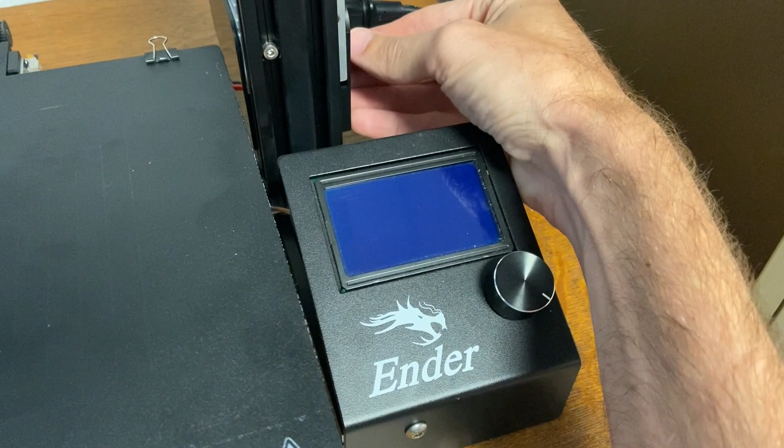So you can see the display comes up, it displays which firmware version you're using, and then you've got some information about the printer. So you've got, this is an Ender 3. This little symbol here indicates the nozzle, and it's currently at 22 degrees Celsius. This is the bed temperature. That flat plate is your print bed here, and it is also currently at 22 degrees Celsius. So that's just ambient temperature of the room I'm in.

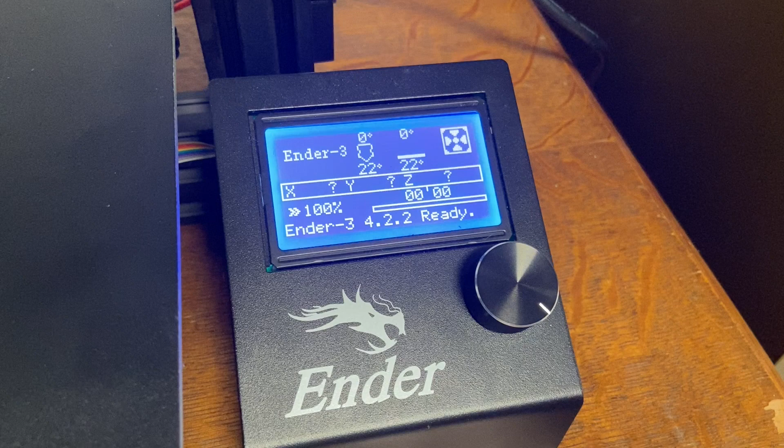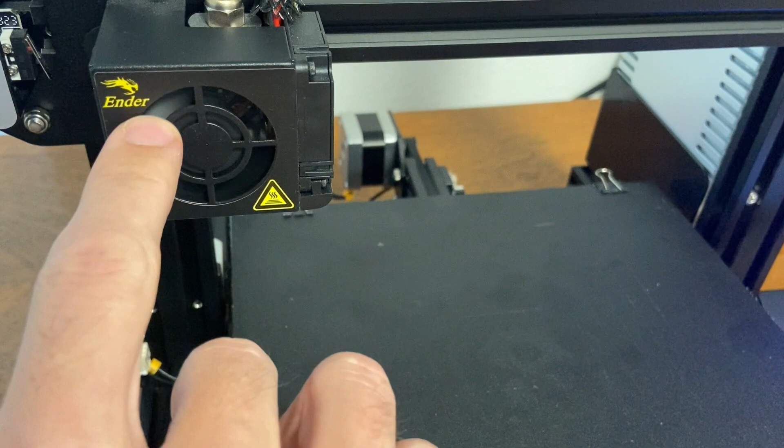Over here, this is a little fan icon, and you can hear the noise running. And that is the fan that is directly in here. And so it's got a pretty good guard on it that you can't get your fingers in, but just don't stick anything in there. This fan will run anytime this printer is powered on. So it's kind of noisy, but this fan is plugged directly into a power port that as soon as the switch turns on, this fan comes on.

There's another fan on the side here, and this fan will be used when you're actually printing. It blows some air down underneath this nozzle and helps cool the plastic that's coming out of the end of the nozzle. And so when this fan is running, you'll actually see this little fan icon spinning.

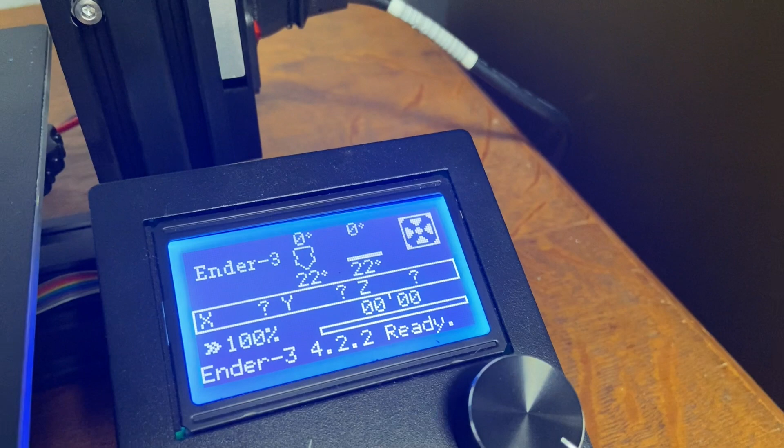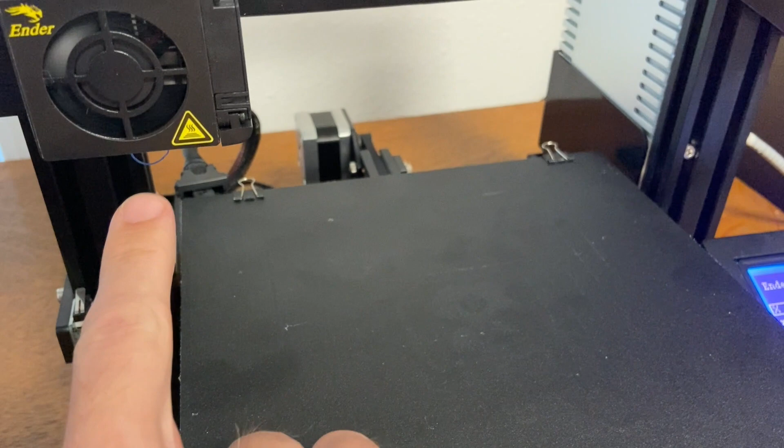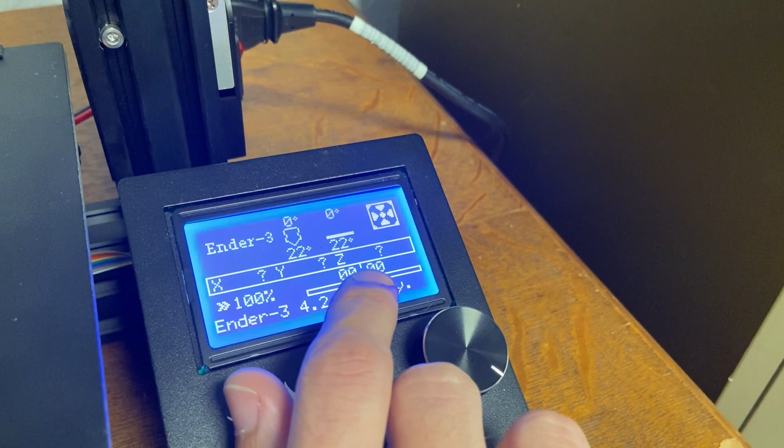So you've got some numbers here. You can see your X, and it currently is changing between a 0 and a question mark because it doesn't really know where the tip of this is yet. You can see the same for the Y and the Z. It doesn't know the position of the nozzle. Here you can see like a little stopwatch type thing. You've got minutes and seconds, and when you're actually printing, this will change and update to show how long you've been printing.

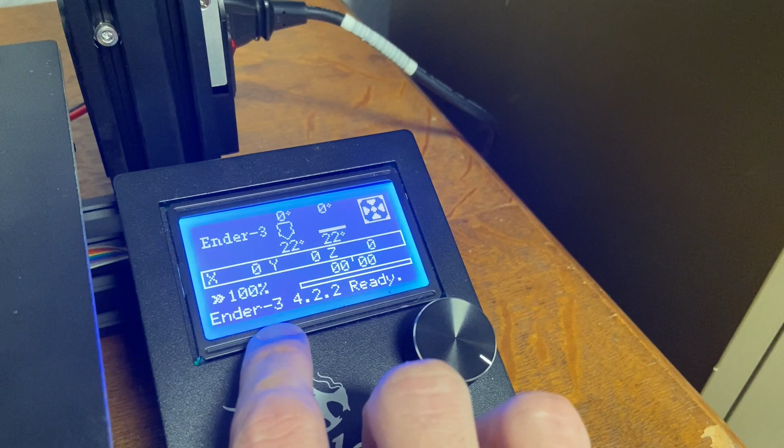Down here we see Ender 3, and we can see that the version of the control board that is in this is a 4.2.2, and you can see it's in the ready state. If you push this button, you go into the menu. In this menu, you've got several different settings or several different controls. You've got motion, temperature, configuration, and you can see about your printer, and then you can see it says no media. We'll come back to that in a bit.

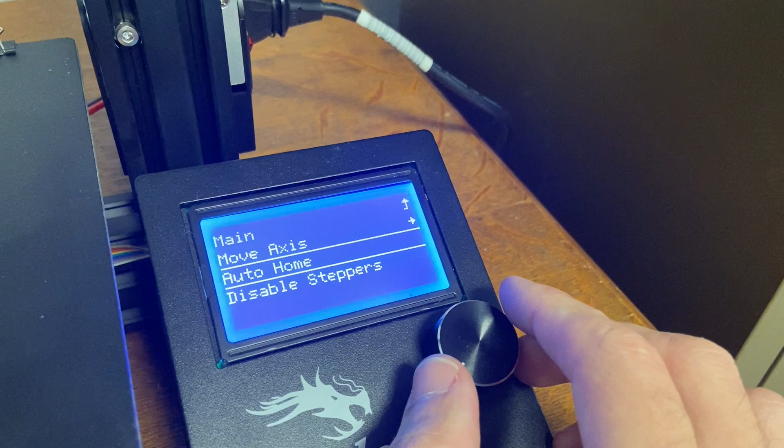So if we click into our motion, we can see we have an option to move the axis. We can auto home, or we can disable the steppers. The steppers are the motors that control the movement of this machine. They're called stepper motors. So if we go to move axis, actually, let's go back. We'll auto home this. So I'll go down, and as soon as I click this button, it'll go into an auto home procedure.

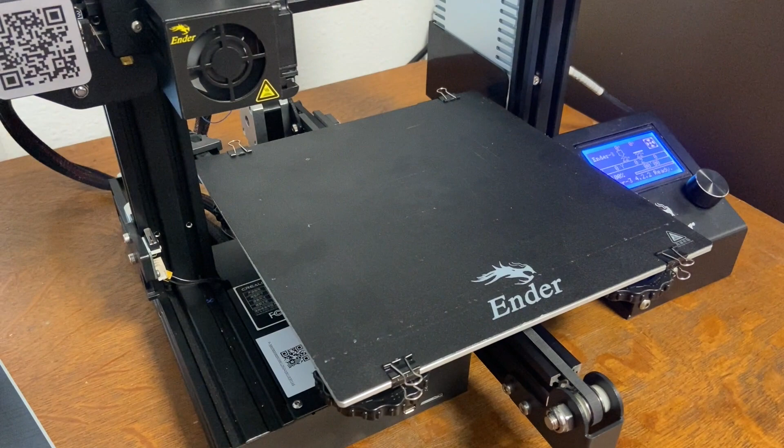And basically what that does is there's a limit switch. So this is a Z limit switch. There's a limit switch up here for your X axis, and then there's one back there for your Y axis. And it'll move until it hits each of those switches, and then it knows that the tip of this nozzle is at the home position, the 0, 0, 0 position. So we'll go back into our menu, and we'll hit auto home.

So it goes up a little bit just to make sure that it has some room to travel. And you can see it did just a little bump on the X axis, and here the build plate will go home. And it's moving at a slow speed right now because you don't want to risk crashing that nozzle into anything. So it goes super slow so that it can stop when it needs to. And you just heard that little switch click.

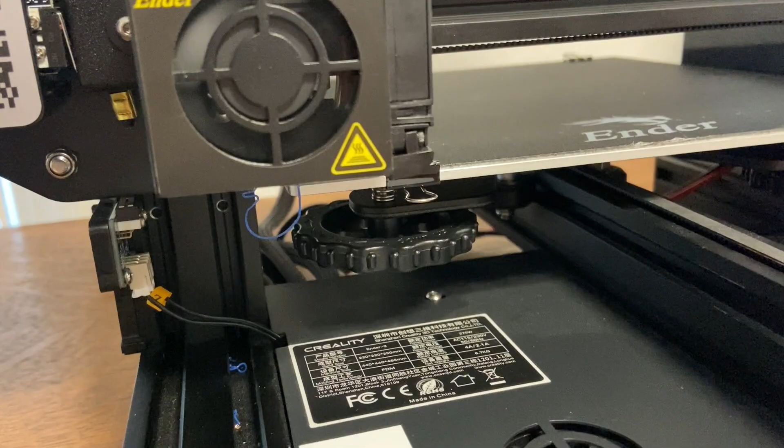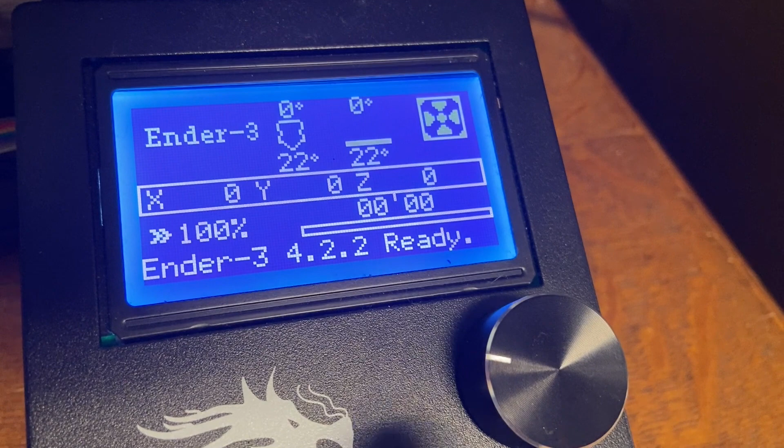And so now we're at the 0, 0, 0 position, and you can see our coordinates have stopped flashing to the question marks because now it knows exactly where it's at. It's at the 0 home position. So now if we go into motion, we can move an axis. And so let's start with our Z just so we get our nozzle away from the bed.

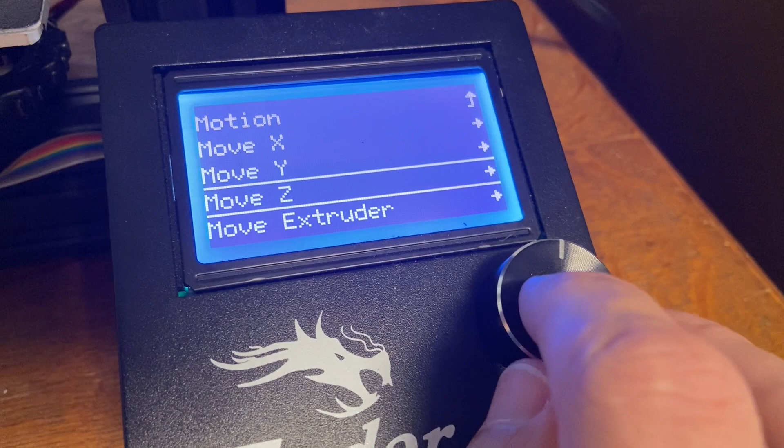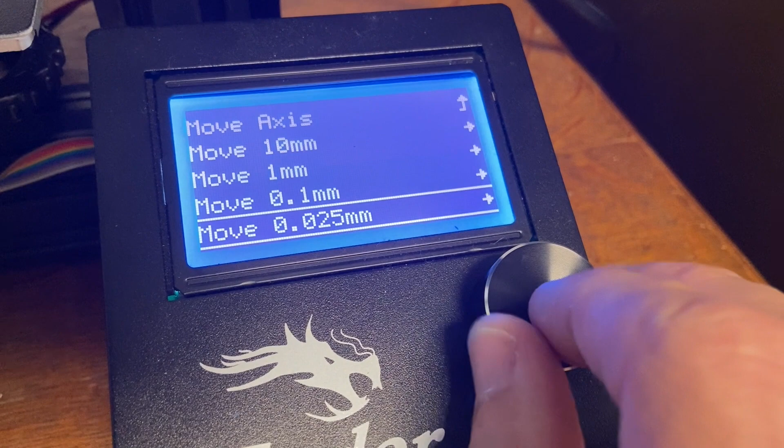So you can move this in increments of 10 millimeters, 1 millimeter, 0.1 millimeter, or you can even go down to 0.025 of a millimeter, which is very tiny. So we'll go to 10 millimeter. So it's going to be a 10 millimeter step. And when I rotate this just one click, it will go plus 10 millimeters. So it should raise this up 10 millimeters.

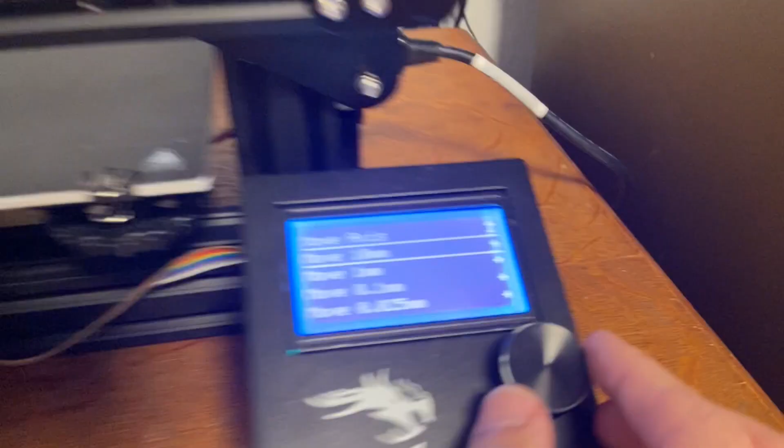And we'll do another 10 millimeters. And now we're at 30 millimeters. And then if we go the other way, it should go back down. And back down to 10. And we're gonna stop there. So we can tap the button to go back, go to the very top, to the up arrow. And now we can do the same thing.

We can move the X-axis, which is this one that goes left to right. So we'll go to a 10 millimeter setting. And now let's do a 0.1 millimeter setting. So see if you can tell how much this moves.

It just moves a very, very tiny bit. And anytime you want to go back to the previous menu, you just go to that return arrow and tap the button.

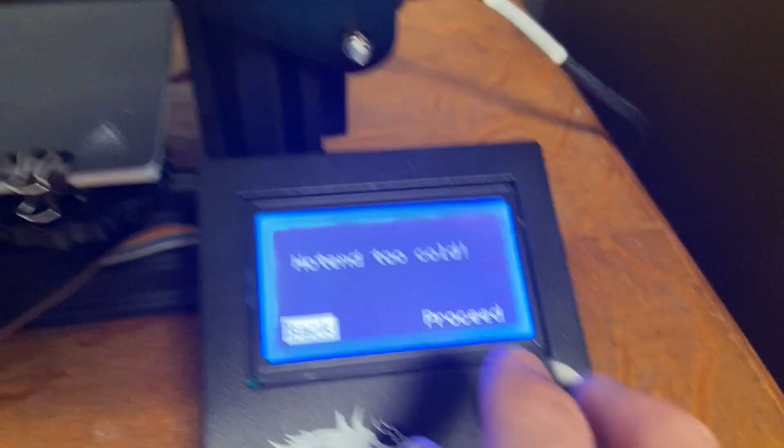You can also move the extruder, and since I don't have any filament in here yet, I will. Oh, so right now I just tried to move the extruder and it tells me hot end is too cold. So that's just a warning. If we had filament in there, you never want to move the extruder unless this hot end is up to the proper temperature for whatever material you have loaded.

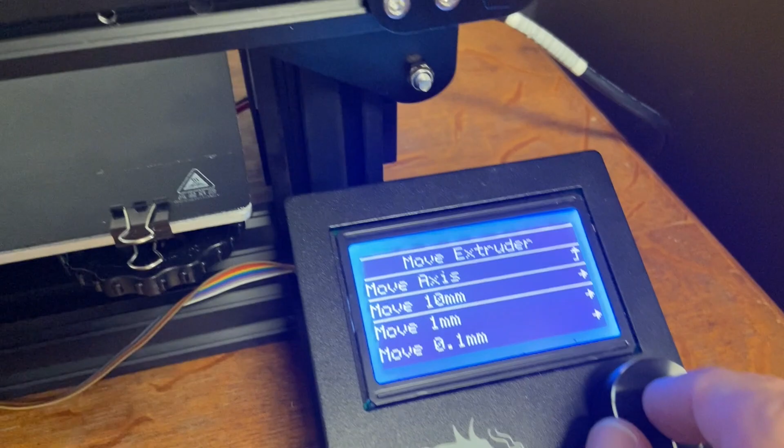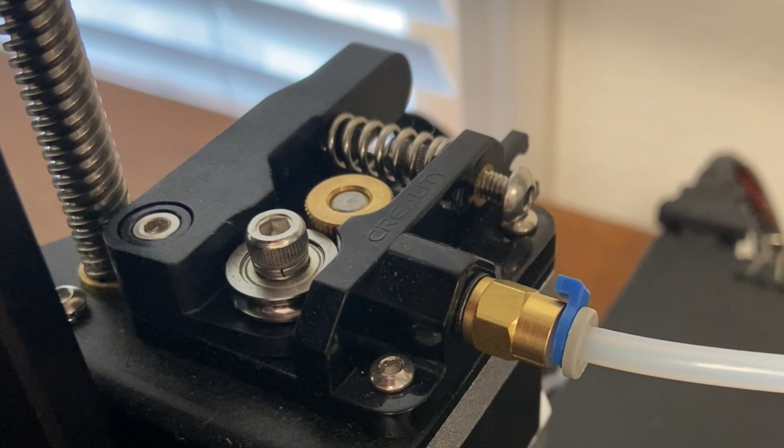But just to show, I'm going to click proceed and I'll do 10 millimeter step. And so when I turn this once, you should see that gold circle there in the middle start to move. Very slow. But if there was filament loaded in there, it would be pushing it through this tube. So I'm going to back out of this. I think that's all we've got in here.

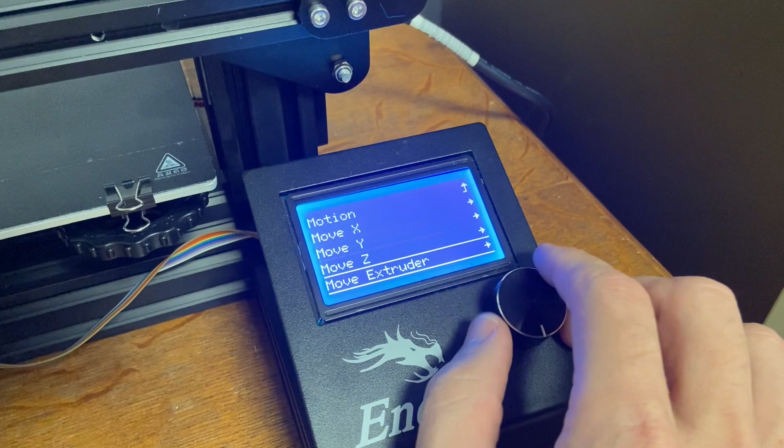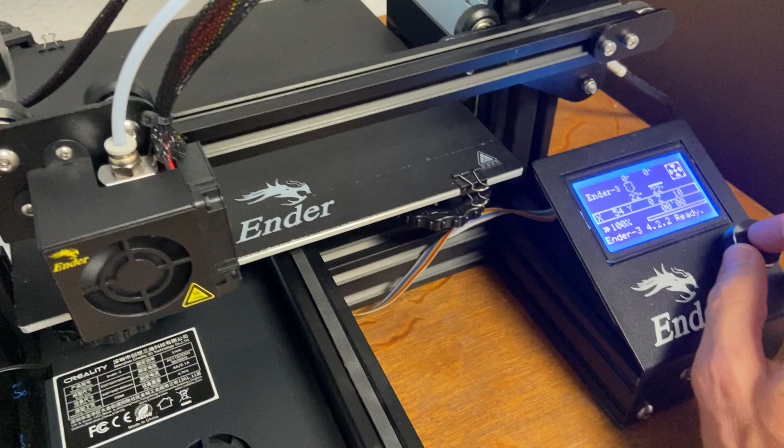So right now, because the steppers are enabled, if I were to try to move this, it won't move at all because the stepper motor is engaged. It's holding this where it is, just so it doesn't move when it's not supposed to. If we go back in to motion and click disable steppers, it will turn those stepper motors off, and now I can push this across, or I can pull this.

When you do these, you want to move them slowly. You don't want to force them too quickly. And then I could also, back here, turn this screw to make the gantry go up and down.

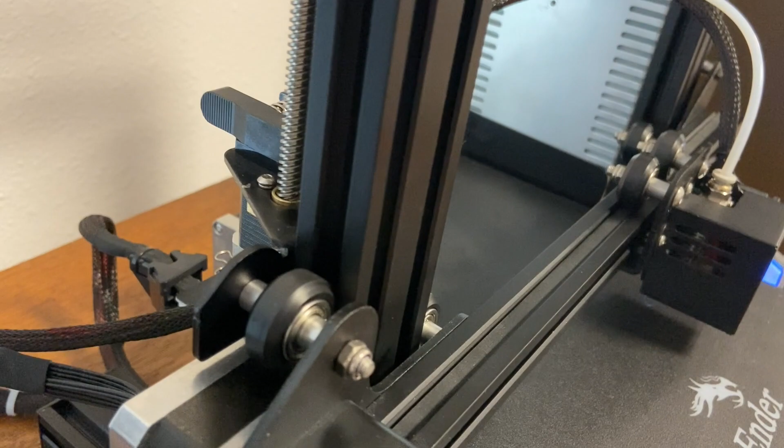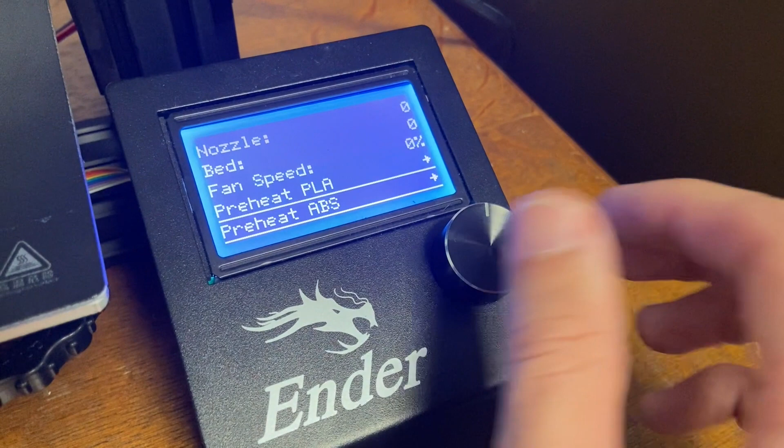So the next thing is going to be temperature. If we go into the temperature, we can see that the nozzle is at 0, the bed is at 0, fan speed is 0%. And then we've got a couple of preheat options. So PLA is the kind of filament that we currently have. ABS is another kind of filament. And they have different temperature settings.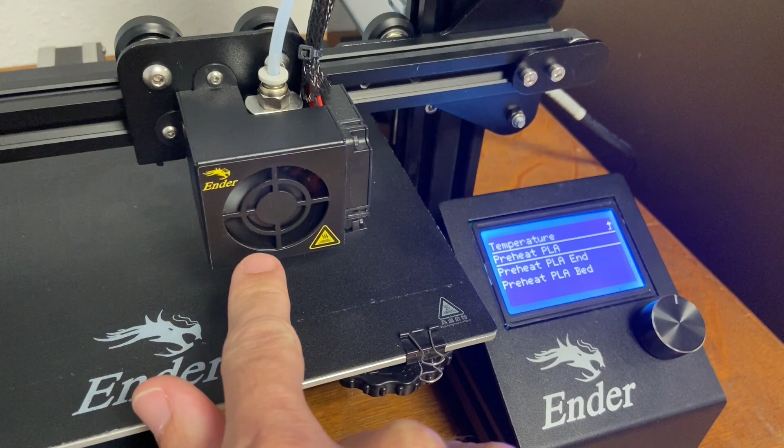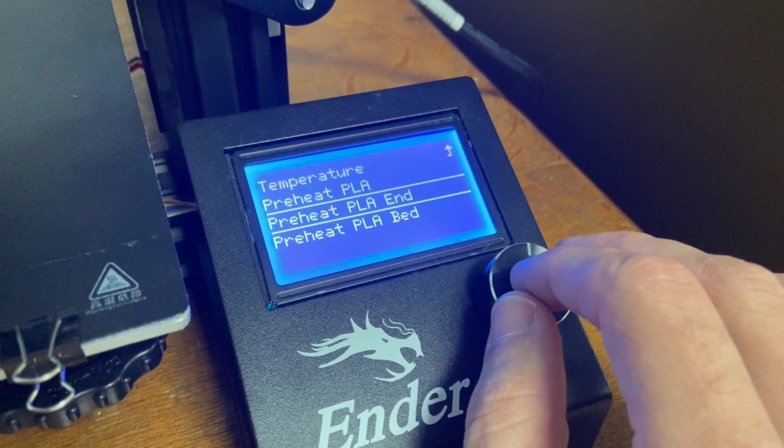So if we go into the preheat PLA, we can either preheat PLA, and that's going to preheat the bed and the nozzle on the extruder, or you can just preheat the hot end or preheat the bed individually, depending on what you're needing to do. So I'm going to go ahead and preheat just the end because I want to get your filament loaded up.

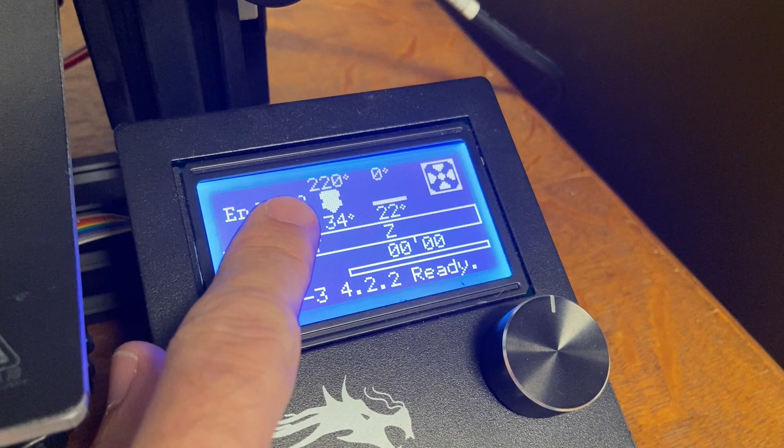So I'm going to click this preheat PLA, and you can see this top number now is configured to go to 220 degrees Celsius. So you can see our actual temperature is starting to rise. This is our goal temperature, and this is the current temperature on the bottom. So while that's doing that, let me get the filament ready to go.

So when you store your filament, you want to make sure you keep it fairly tightly rolled, because if this were to get tangled and kind of knotted up on this spool, it's not going to come off of here, and it's going to cause you issues when you're printing. Usually on these spools, there's some little slots that you can kind of weave the filament through, because if you just let it go, it will kind of spring out of control sometimes. So you can see the end of this is not real straight. It's got like a little tail coming off of it there.

In order to load it, we want it to have a nice smooth finish, and it's usually easier if you're able to cut this at a 45-degree angle. You could probably use scissors, but a pair of fingernail clippers or something would probably work better. So I'll just cut it so it's got a bit of a point on it, a little bit of an angled cut. And that's just going to make it easier to load into our extruder here.

So you want to make sure you position your spool on your spool holder in a manner so that it will line off and go into the extruder in the smoothest way possible.

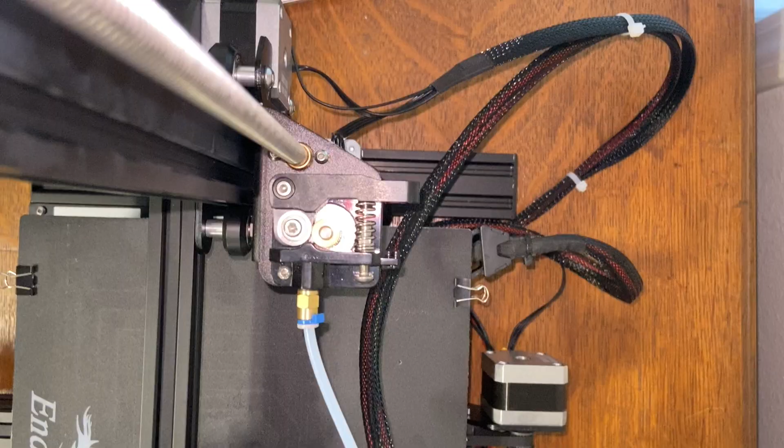Okay, now on the extruder itself, you've got this little lever here, and there's a spring. That spring, it's pretty stiff, but when you squeeze this together, and you might need to get your mom's help or something for this, but when you squeeze this together, you can see it separates these two wheels. So this is your drive wheel, and this is your tension wheel.

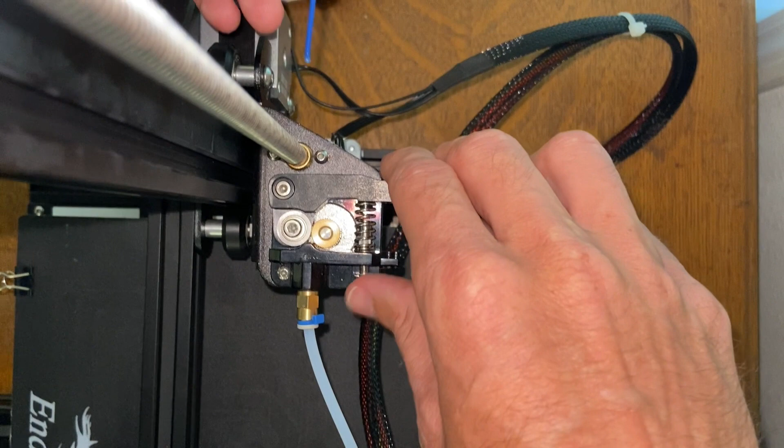And so what you need to do is, through the back side of this, there's a hole that filament will slide through, and you can see how it's coming through there. So once you get the filament slipped through this arm, you have to squeeze this so that it removes tension, and then you have to get it forced into that hole, and then ideally you want to keep this squeezed and keep pushing it through until it goes all the way through this Bowden tube.

So this is just kind of finger tight on here, so if you need to, you can unscrew this. There's a little tiny blue washer on here, don't lose that. But you can squeeze that and kind of push that out to make sure your filament's coming all the way through. And then you can slide that back on and thread it back in so it's finger tight. I'm going to move this camera a little bit.

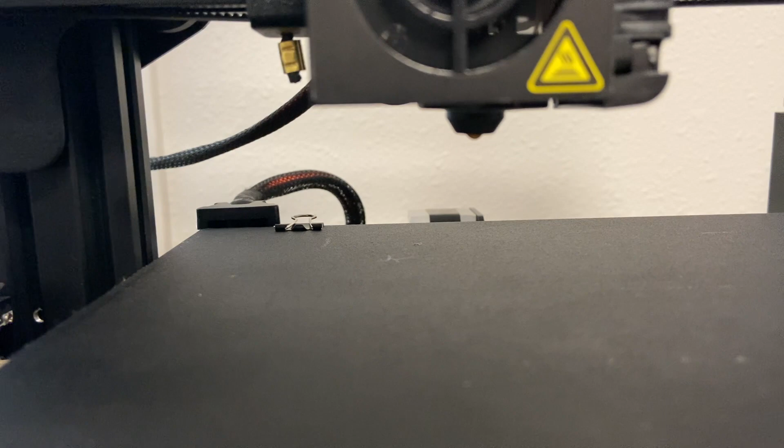And so I'm going to squeeze the tension arm over here, and with that squeeze I'm just going to push this through here by hand, and you should see it starting to go through the Bowden tube. And so push it all the way until it gets to the hot end. And so with the hot end up to temperature and the tension arm still squeezed together, you can just keep pushing until you can start to see some filament come out. And now we know that we've got filament all the way to our hot end.

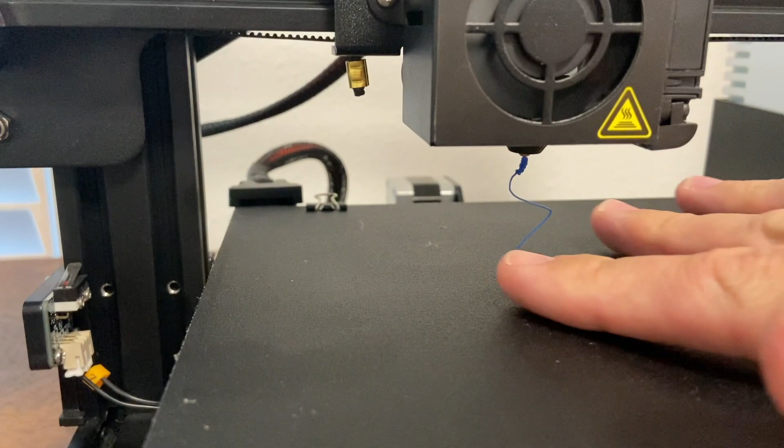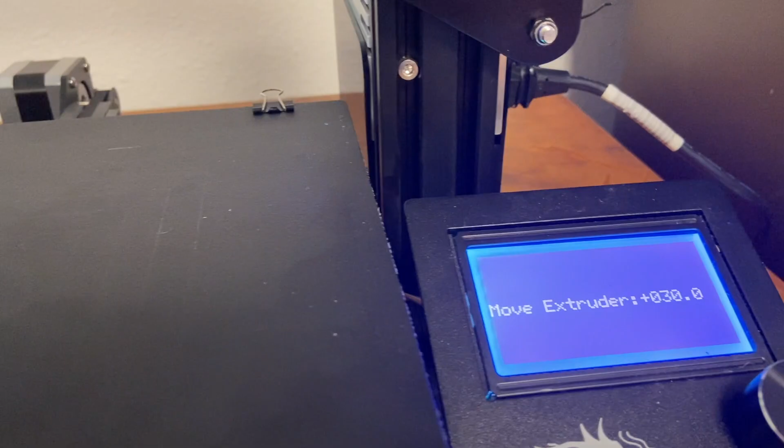So now we can go back to our motion menu, move axis, and we'll move the extruder. And I'm just going to set it on 10 millimeters. And so you can see the filament is kind of starting to ooze out of here even without me moving it. But when I turn this to 10 millimeters, I think I made it 30 millimeters. And so it's going to push 30 millimeters of plastic out of here.

And so that's basically what it does when it's printing. It just pushes plastic out, but the tip of this nozzle is super close to the bed or to the layer that's below it, and it just squeezes plastic out and continues squeezing it out until your print is complete. So you can see with, let me get back out of here.

So you can see we're at 220 degrees. And for this particular filament, this brand of filament, 220 degrees is probably a little too much. And I say that because the plastic continues to ooze out of here. When you have a correct temperature, it won't ooze as much, but it'll still be melted enough to squeeze it through the hole in the nozzle. But we just wanted to get filament loaded up in here, and we can go on to the next step.

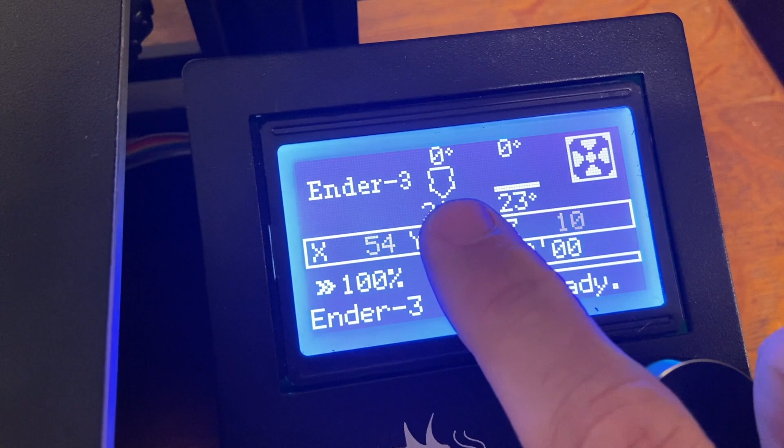So for now, I want to turn the temperature back down. And so if you go into temperature, you can do cool down, and basically it now sets our desired temperature to 0 degrees, and that's Celsius. And you can see it's already starting to cool down. And it's cooling down because this fan is running and drawing some heat away from that. So let that get back down to temperature so we don't burn ourselves on this nozzle, and we'll be good.

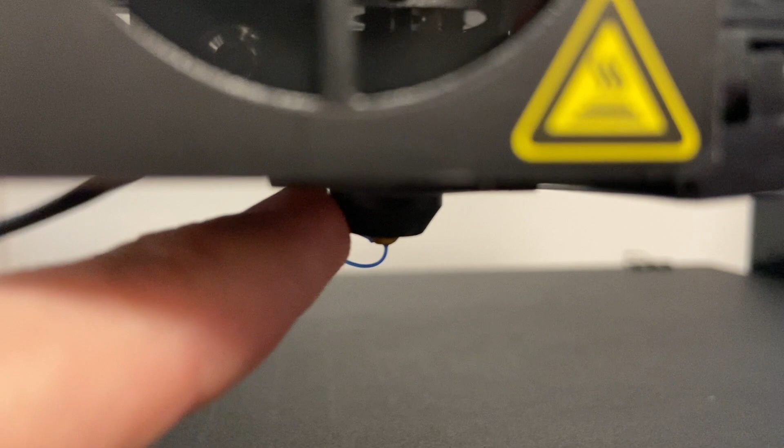One thing that is nice about this particular extruder is when you get up close to this nozzle, you can see a little bit of brass sticking out of the end. That's the actual hot part. This actually has a silicone cover on it, so if you get your finger close to it, it's not going to be as likely to burn you. If you hold your finger on it, there's enough heat coming off that it will get warm pretty quickly, but it won't instantly burn you. So I would recommend a pair of long tweezers or something for getting those little pieces of plastic off of there. But it's nice having that silicone cover on.

So you can see all these little plastic bits. Anytime you're dealing with 3D printing, you will end up with a lot of these. So it's nice to have a trash can or a cardboard box or something close by. These are cooled down, so they're cool to the touch, but just so they don't get mixed up in the carpet and stuff, it's nice to have somewhere that you can throw them in.

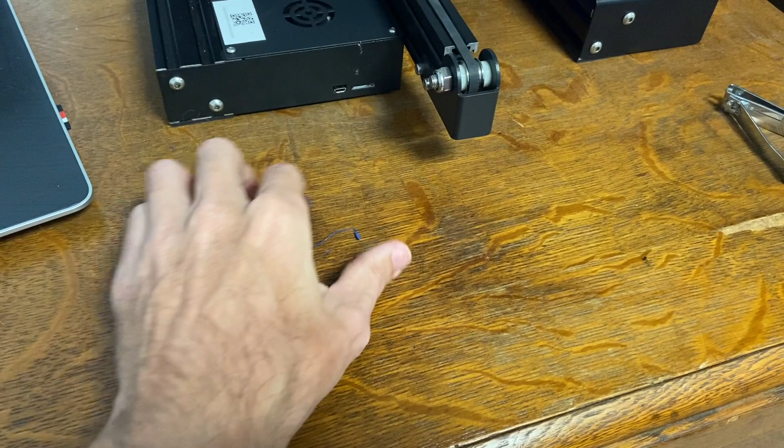This particular plastic, PLA, is a somewhat plant-based plastic, so it's not as bad on the environment as some of the other plastics. That's something to be concerned with if we're just creating a bunch of plastic waste. This will biodegrade faster than normal plastics, so that's a good part about using PLA for this.

Okay, so now let's get into actually using your 3D printer. So in order to actually be able to print something, you have to be able to tell the printer what to do. The way to do that is by finding a 3D model that you want to print. You can find one from various sites, thingiverse.com, Thangs, Thangs.com.

There's a variety of other ones. Thangs is one that I just learned about in the past couple days. Thingiverse has been the one that I've used for quite a while. But you can just search for something you want to print and download the model. When you download the model, it's going to be an STL file. And that is basically a 3D model.

In order to get that prepared so that you can actually print it, you have to use a software that will slice it into individual layers. So probably one of the most popular out there is called Cura. And so you can just search for Cura, and it's just free software. It is made by the company Ultimaker. There is another slicing software made by Prusa, P-R-U-S-A. I have not tried that one, but it is another option.

So just click on Cura's site here, and they recently released version 5 of this. I haven't actually tried version 5, but you can just download it for free, and you choose what operating system you're going to put it on, so if you have a Mac or a Linux or a Windows machine. And so you can see up here it's downloading, and once it downloads, we can just open the installer. And so typical installation, just click next, agree to their terms, choose the default install location, and you can just install it. And we'll let this install and be right back.

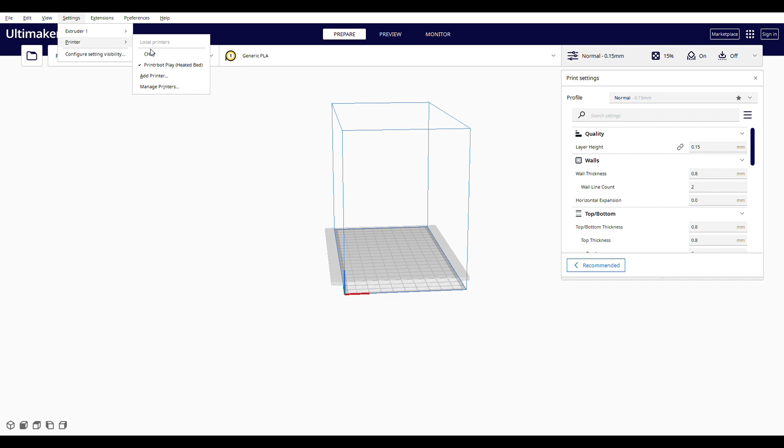When Cura opens up, because I already had an older version installed, it did pull forward my other 3D printer profile, but yours may actually prompt you, since you've never installed it before, to configure a new machine. If not, you can just go up to Settings, Printer, and Add Printer. And this will be a non-networked printer.

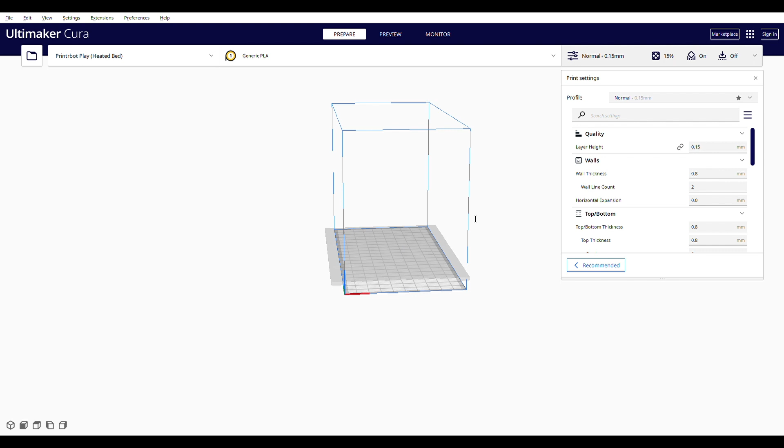And so you can see it starts out with Ultimaker because this is their software, but if you collapse or just scroll down past Ultimaker, for your printer, go to Creality 3D. We'll expand that, and we'll choose the Ender 3. And so if you wanted to name it something specific, you could change the printer name here, and we'll click Add.

So someone's already created a profile, kind of basic machine settings, and so this tells you your X width, so the maximum size piece that you could print is 235 millimeters wide, 235 millimeters deep, and 250 millimeters tall. Our build plate is rectangular shaped. We have a heated bed. We're using Marlin. And then this is just the print head settings, just to make sure that the extruder doesn't crash into anything. We have just one extruder, and we'll apply these. Basically, all the default settings are good to go.

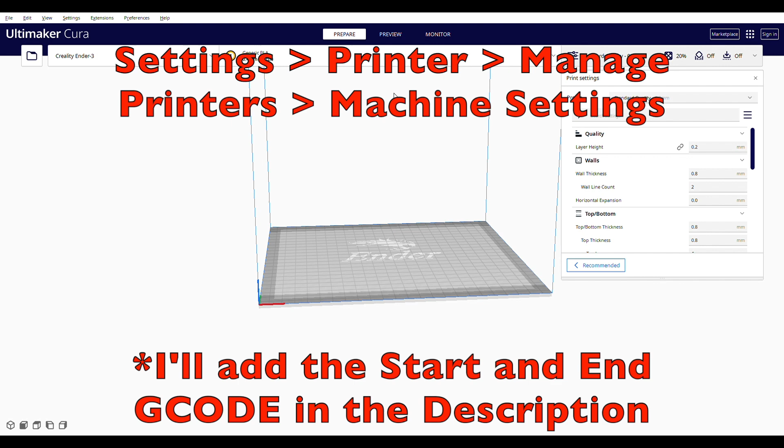One thing that I would recommend changing is the start G-code, and I will actually give you all those settings so that you can set them up on your installation. So we'll just leave it at this for now. I'll go ahead and hit next. And now we can slice some models.

Okay, so here we came to Thingiverse. This is just a website that has 3D models for lots of stuff. I'm going to see if I can find the test print that normally comes with this printer, and it's just called Test Dog. And here it is, the Ender 3 Test Dog. So if we just tap into this, we can see there's a download all files button here. I think that downloads a zip folder, but we really only want the one item.

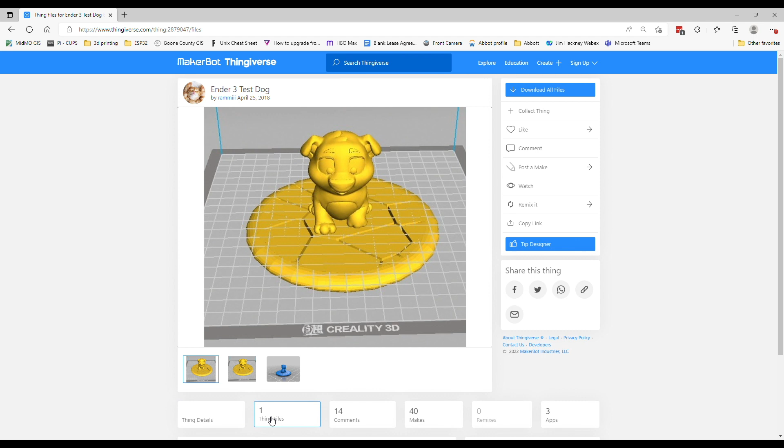So we can just go to the thing files, and we can see it's called Test Dog STL, and we'll download that. We can then go back to Cura and click our little folder icon or the file menu up here, and we go to our downloads, and there's our Test Dog. And so we open that up, and here we can see it on our print bed.

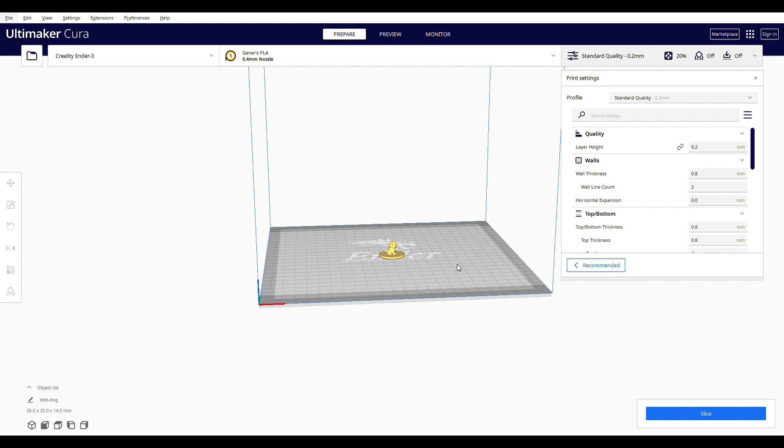And if you click the model, you can see down here your dimensions. It's 25 by 25 by 14 and a half. And that always goes X, Y, Z. So it's 25 millimeters wide, 25 millimeters deep, and 14 and a half millimeters tall. So the nice thing about STL files is you can resize them to whatever size you want. So with the model selected, you click the scale over here. If you leave it on uniform scaling, it's going to scale everything the same amount, X, Y, and Z.

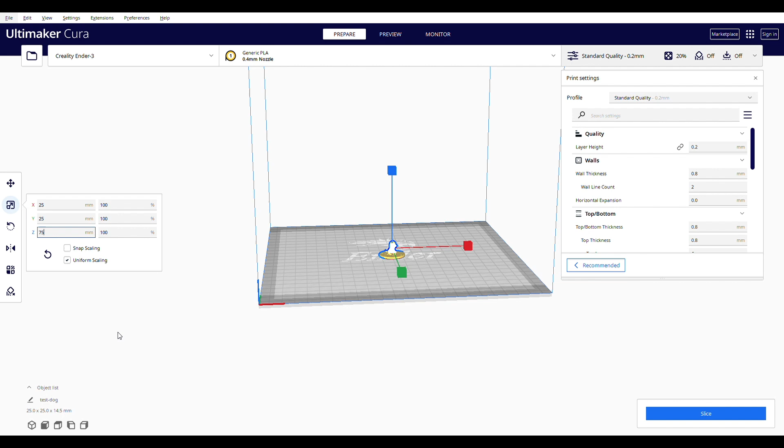If you were to uncheck this, you could just make it taller and leave it to be real tall and skinny. It may look funny doing that, but we'll just leave it on uniform scaling. And let's say we wanted this 3 inches tall. So 3D printing really makes you think about things in a metric world. 3 inches is roughly 75 millimeters. And so I'll do this a 75 and hit enter. And you'll see that the X and Y sizes will change as well. And it makes our model much bigger.

You can click back on the move, and you've got some arrows here. And so if you click on the red arrow, you can just move it left and right. If you click on the up arrow, you can actually lower it down and only print like the dog's head. You can't print it above because it's got to be touching the bed, but you can lower it down. So if you didn't want to print that base, you lower it like that. Or if you just grab the model, you can move it

around just about anywhere. If you right click on the model, you can center it on the build plate. You can also multiply it however many times you want, and it'll try to fit them on there. If it can't, it just puts them off to the side over here. So we'll delete those.

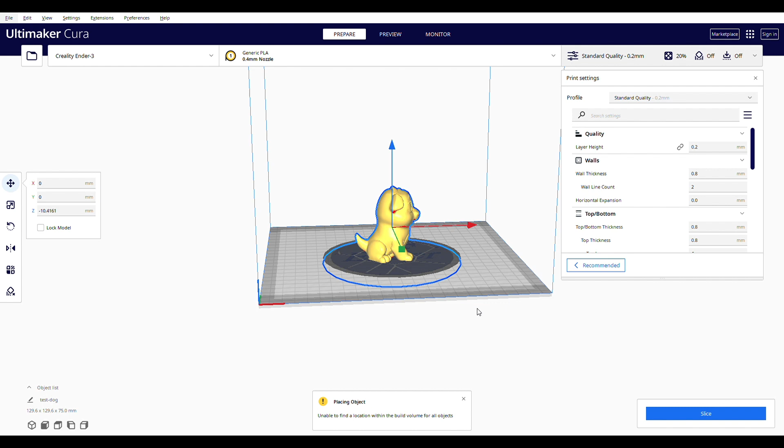If you zoom in on this, you can see how most of this is yellow, and that means it's all good. But if you hold your right mouse button, you can kind of move around it. All of these red areas indicate places that may potentially not print too well because the printer would be printing on nothing. That's called an overhang. And so if there's nothing to support when the printer squeezes the filament out in that spot, it'll just droop down. So sometimes that's desired, sometimes it's not.

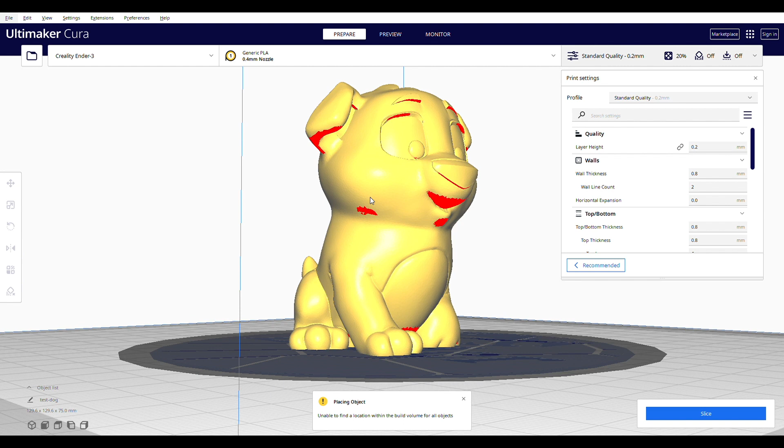This particular model is designed to be able to print without any kind of supports, so it'll print just right out of the box. But that's what those red areas indicate. If you had something that came way out over here, there's not going to be anything to support that print. But in the print settings here, you can generate support. So it'll actually print a structure to help support underneath things that wouldn't otherwise have support. After the print is done, you can snap off those support pieces.

But this is just kind of a basic print. You do have profiles, and so this shows a standard quality or a dynamic quality, and basically this is either thicker or thinner layers. The thinner the layer, the greater detail and smoother the finish. If you've got thicker layers, it's a little bit rougher of a print, but the actual time it takes to print is much less. So leaving it on standard quality, if we were to slice this, click the slice button down here, it's going to go through and slice this into a bunch of layers. And then we can actually preview.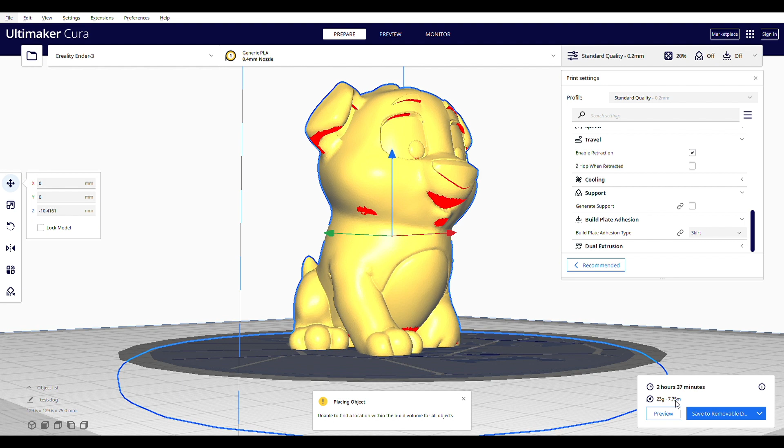So you can see this particular model in this size, being 75 millimeters tall and roughly 130 millimeters wide. You can see it's going to take 2 hours and 37 minutes. It'll use 23 grams of filament or 7.75 meters of filament. So we can preview this, and here you can kind of see all of the individual layers. Over here on the right, we can see it would be 323 individual layers, and we can drag this top one down and kind of see each layer.

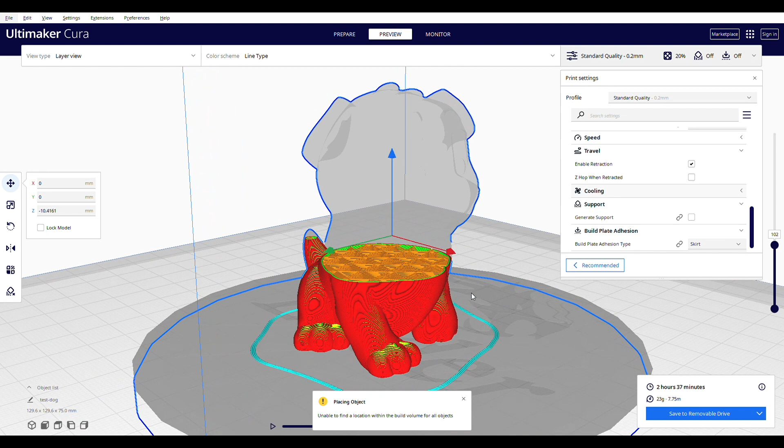If we hold our right mouse button and kind of pan up, we can see it's got this weird cross-hatching inside. This is called infill. And so most 3D printed parts are not completely solid. There's some hollow areas inside. This uses an infill pattern that will support those layers that will be stacked on top of it, but you don't have to print it completely solid.

Typically infill, this is an infill density of 20%, and so you could increase that to 100%, so it would be a completely solid object, but it's going to drastically increase your print time. Of course, if you reduce the amount of infill, it will decrease your print time. And so I dropped it down to 10%, and we'll slice it again. And so you can see it dropped, what was it, about 30 minutes off of that.

But you can see how much bigger of shapes this is inside here. So you don't have as tight of an infill. There are different infill patterns too, like you can do a grid or lines or whatever. Anytime you change a setting, you'll have to re-slice it.

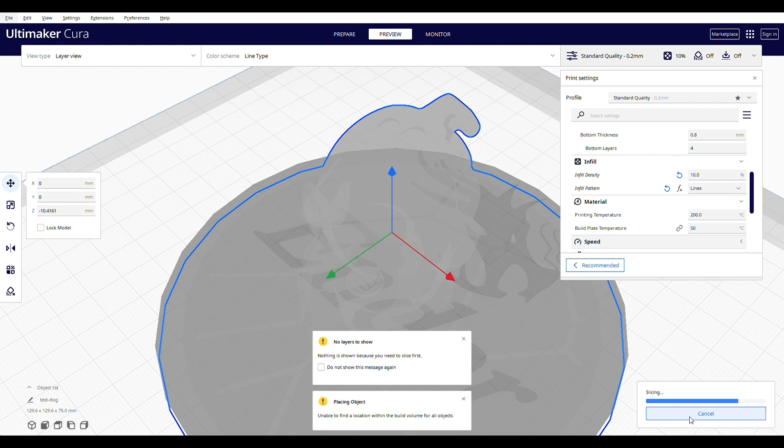And so this is lines, so one layer it'll print lines this way, and the next layer it'll print lines this way. But you can drag down through each layer, see kind of what it's going to look like. And then also, get rid of this little warning here. Also, you can use this, and you can see the path that it's going to take for this particular layer.

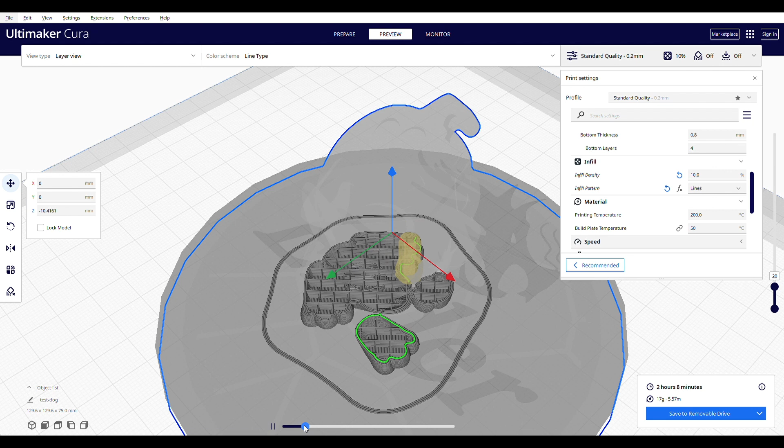So here you can see it's going to start with the foot. There's a little play button here. You can hit that, and it'll actually show you this is basically real-time speed of how fast it's going to print this layer. So it goes through, it prints one wall, and then it'll print this other wall. And we can kind of speed this up. Prints an inner wall, then an outer wall, and then it does the lines for the infill. And then it does the little support areas for where it needs to stack stuff up.

So basically, that's it. Once you get your desired print time and your desired settings, you can save. You will need a micro SD card. And so this you could just save to a removable drive, and it's going to save it directly to whatever micro SD card you have inserted into your computer. So there we go, saved to a removable drive, and we can go ahead and eject our SD card so that we can put it into our printer.

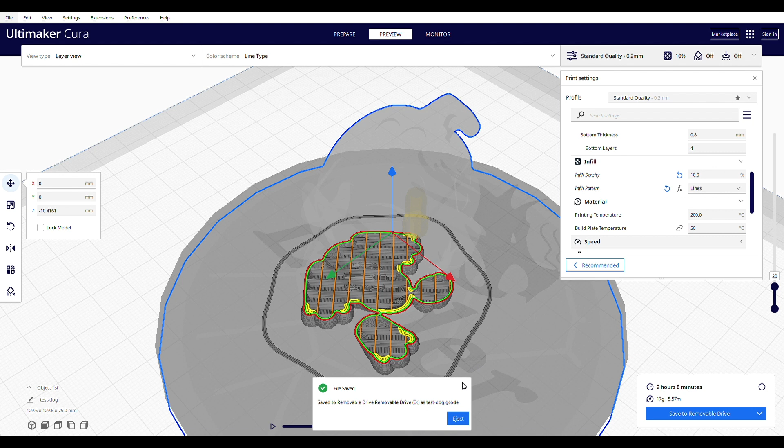Before we do that though, let's look at one other thing that we'll need. So the other thing that you're going to want is a manual bed level process. When you slice the model using Cura, it creates what's called a G-code file. And G-code is just the instructions for the printer to know exactly where to move this extruder, how high to move it, everything it needs to do to print your file. For that to be successful, you need to make sure that the bed is perfectly level, because no matter where this extruder is on this bed, whether it's in this corner or that corner back there, you want it to be the same distance from the bed.

So there are some manual leveling processes. There's also some additional hardware that you can buy that will kind of do it for you, or calibrate it in software and kind of do everything. But the manual process isn't bad, especially with the help of a manual bed leveling file that you can download.

So I'll give you guys a link for this. There's also a really good video showing how to do it, but I'll show you too. So there's a YouTube channel called CHEP, does a lot of 3D printing stuff, and he actually created a file to help manually level the bed on an Ender 3, and then also a print that you could verify that your bed was level. So I'll send you a link for that, but I'll just go ahead and put those files on the SD card and we'll get it moved over.

Okay, so I got the micro SD card, got the test dog and the 2 bed leveling files on here. So with the label side up, right here in the bottom corner of the control box is a little slot for you to put this card in. Push it all the way in, you should hear it click. The printer, we'll go ahead and power it on. And now we'll tap our wheel to get onto our menu, and we can go all the way down to the bottom and we'll see print from media. So this is actually reading off of the SD card.

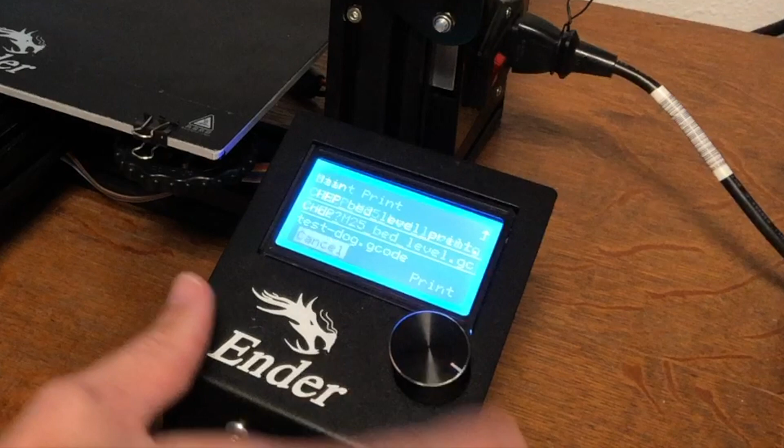So I'm going to go down to the bed level and we'll click the button, and it says you want to start this print, and you can either cancel or print. Before you start this, you need just a small piece of regular paper, and this is going to be used to kind of gauge our distance. So we'll go ahead and hit print.

And what this is going to do, it'll auto home so it knows where it's starting from. It'll do this before every single print. Goes and hits those limit switches, and you'll notice it says print paused here. So it's homed, it's ready to go. Now when we tap this button, it's going to tell it to go to the next spot. It's going to move this nozzle so that it's directly over the first leveling knob.

Click into the menu and click resume print. And so it raises up, it goes over the leveling knob, and it pauses again. So now what you do with your paper is you want to try to slide it underneath the nozzle, between the nozzle and the bed.

So I currently can't get this one in there, but there's a knob down here, and if you push the left side of the knob forward, that will raise the bed. If you push the right side of the knob forward, that will lower the bed. So I want to lower this so that I can get this paper under here just to show you. So I'm going to spin that like maybe a few small turns, and now you can see I can get that paper all the way through there.

So now I'm going to push the left side of the knob forward, and I'll test to see how close my paper is. I'll kind of drag it in and out. Go up a little bit more. Now I'm starting to feel it pull just a little bit. A little more. It's getting a little tighter. A little more. And so this basically I can't push it through, but I can pull it through. I'm going to go a little higher. So it kind of bends when I try to push it, but I can pull it through. So that's a pretty good spot to be.

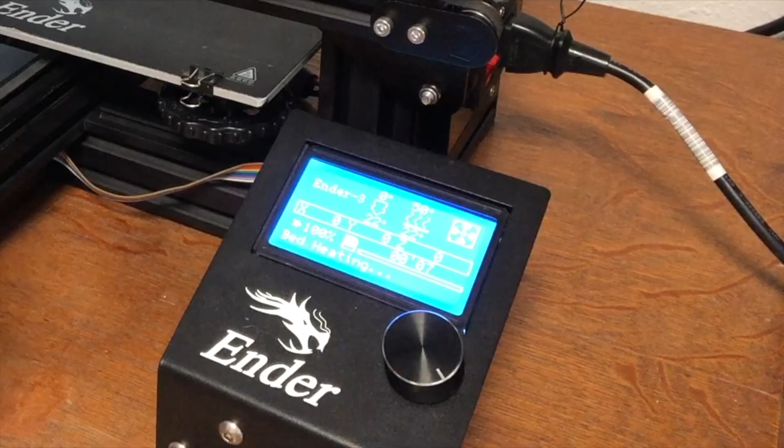So that is the bed leveling process. Our bed should be level and ready to print on. So now we will go to the actual bed level print. And so this is just going to verify that something will print successfully. So we'll print that, and you can see it's going to do its homing process. It does that before every print. And now you can see down here it says bed heating. And so you can see the bed is heating up to 50 degrees.

Once the bed is finished heating, it will heat the nozzle up to whatever the set temperature is. I think it's 200. Okay, so our bed is up to temperature. The nozzle is getting really close. It's set to 205. We're at 200. So this should start here in just a second. So this print is going to be a series of squares, starting with a pretty big square on the outside, and it'll go around and do smaller and smaller squares just to make sure we have good adhesion on all parts of the bed.

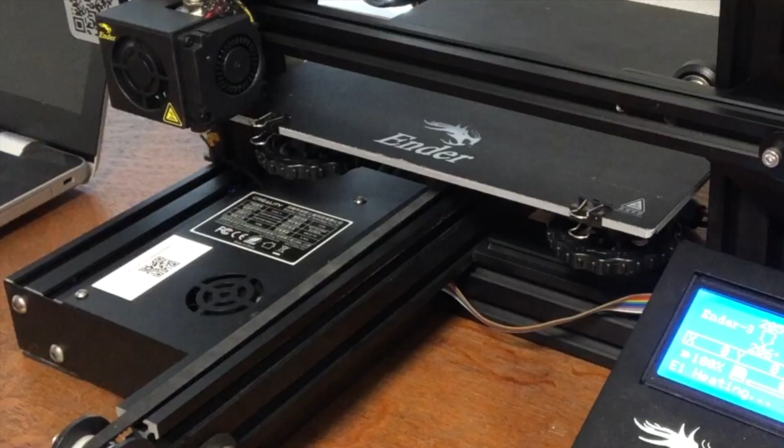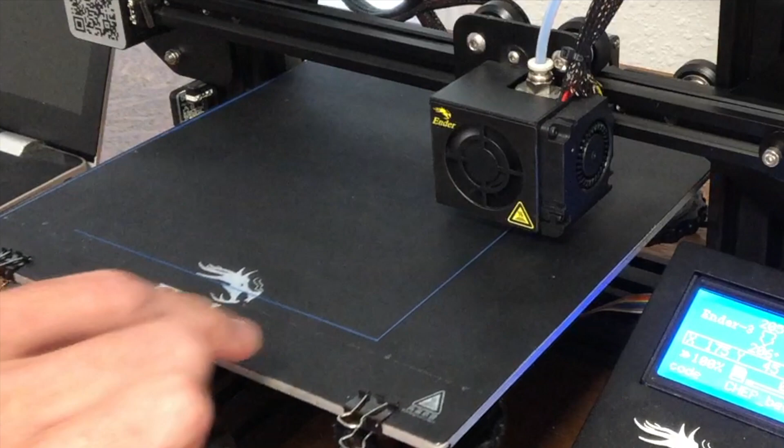So it does a little beep to indicate that it's starting. It's doing 2 lines down the very side here. That is just to purge the nozzle to get any old filament out, get some fresh filament flowing through there. And now we can see it's starting to draw some lines on here. So this bed is warm, but if you rub over and this filament comes unstuck, what you can do is raise whatever corner that's in just a little bit. So this is going down pretty good. I can tell it's got some good squish, but it's not too much squish. And so I think we're dialed in and ready to start printing stuff.

So transporting this, moving it from my house to your house, may cause this bed to get out of level. So you may have to do this again before you actually start printing on it. So it'll keep making squares until it gets to the very center, and then it will just repeat. And it makes these about 2 millimeters tall. I'm not going to do the whole thing, and I wouldn't recommend that you do it either. If the first layer sticks, usually it's going to be good.

So there we got all the squares. It's going around, and it will start to do another layer, and it will just keep stacking layers up. This particular file will print these 2 millimeters tall, but we're only 0.5 millimeter now, so it's about 5 or 6 different layers. But the first layer stuck on all of the different sizes.

So I'm going to go in here and we can just come down to stop print. And it asks us, are you sure you want to stop it? And so you can stop. So it's going to raise off the print and move over out of the way. So that's what happens when the print is aborted. So it moves the bed all the way back.

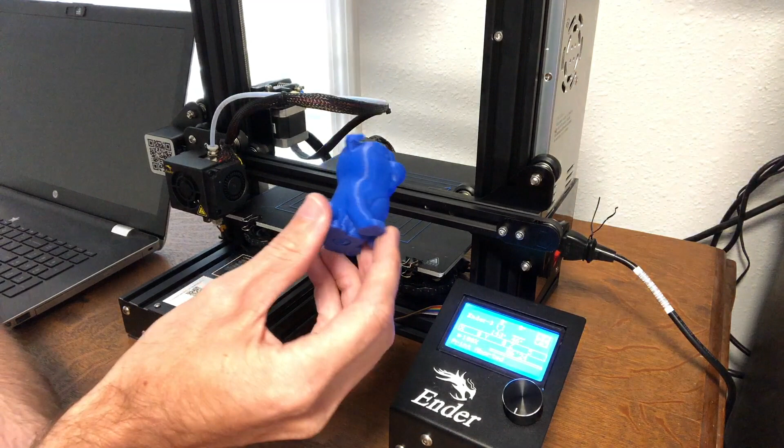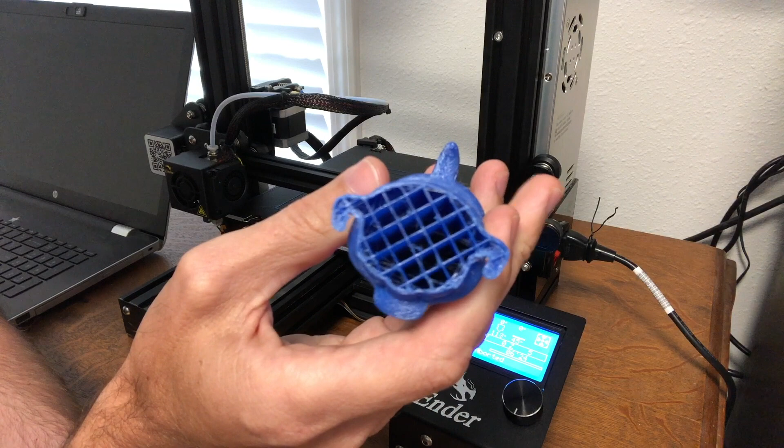That's basically it. This is the test dog that I started printing last night, and it was printing really well. You can see it's pretty good, but you can see the top of his head is missing. When I went away from the printer for a while and came back, it had stopped printing, but it wasn't complete. So here you can see kind of what that infill looks like. It's just the cross-hatching inside, so it's partially hollow, but it's still strong. I can't actually squeeze it. I'll send this with you too, just so you can see it.

But what happened is the spool of filament up there had a tangle in it, and it just kind of got a knot, and it couldn't pull any more filament out. So basically it ran out of filament, and it kept on doing its thing until it got to the end of the file. There was no filament coming out. So that's why I have a headless dog, or brainless dog, I don't know.

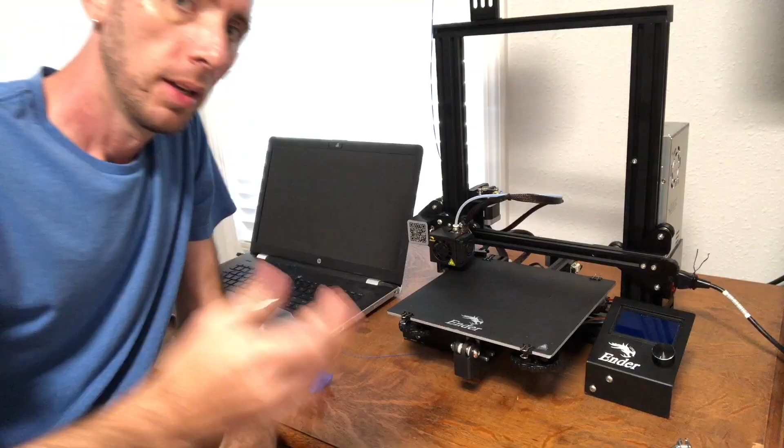So one other thing that I forgot to mention, in regards to bed leveling. This black surface on the top of here is actually a removable printing surface. You've got your little clips in each corner. It's a kind of a stiff piece of plastic, but it's got a little bit of texture, and it helps the filament stick to it. If you've got a print that is really stuck to this and you can't pry it off, you can undo these clips, pull it off, and flex this print surface, and it'll help get your print unstuck.

When you do that, there is potential that you may have to re-level your bed. So if you're able to get prints off without removing this printing surface, that's the way to go about it. But you saw the leveling process. It's not that time consuming, and once you do it a couple times, it'll go super quick. And you probably won't even have to do the bed level print unless you're really unsure if you have it level or not. So I think that's all I've got.

3D printing can be very, very frustrating at times, especially if things aren't working like you want them to. But this printer is really nice because there's a ton of community support on the internet. You can just type Ender 3 and whatever issue you're having, and usually find people that have had the same issue and know how to fix it. There will be issues that are unique to this that other printers don't have.